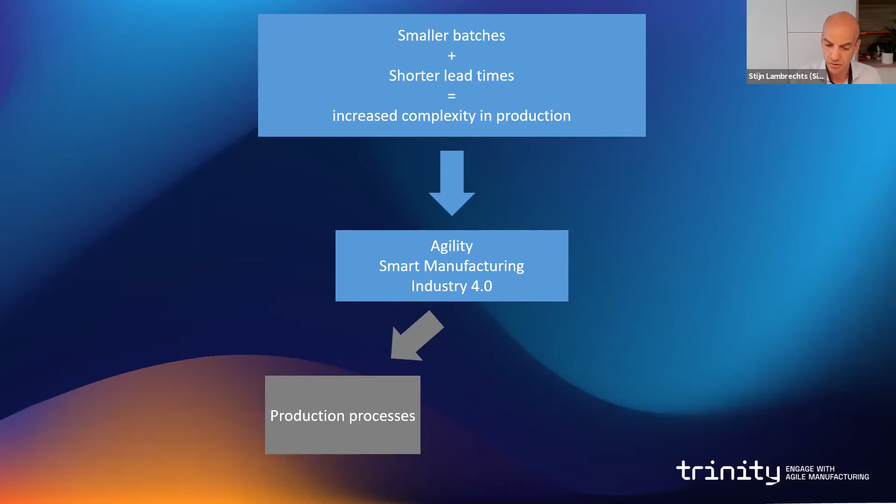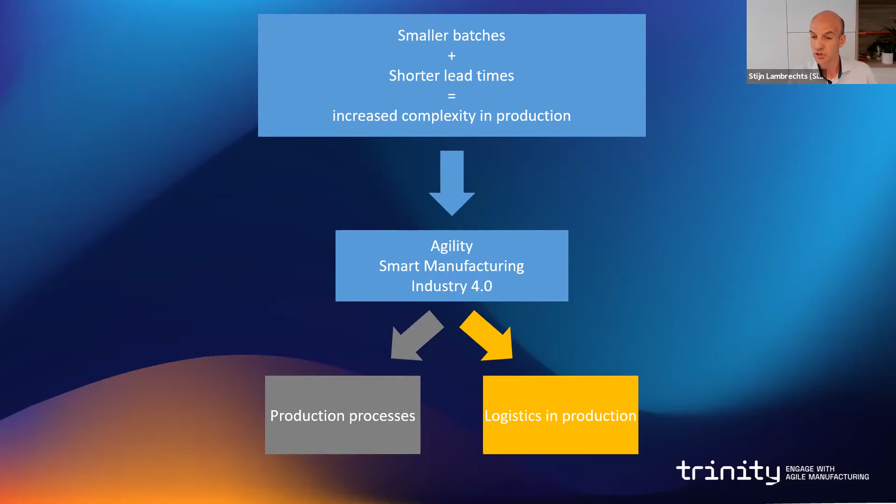Today we will be talking about the processes that link these different production steps to one another. Today we will talk about logistics in production. And when we look at figures and see that sometimes up to 50% of the time an operator spends is on logistical tasks, it means to us, we are convinced that there is still a big opportunity to improve for companies in this production logistics domain.

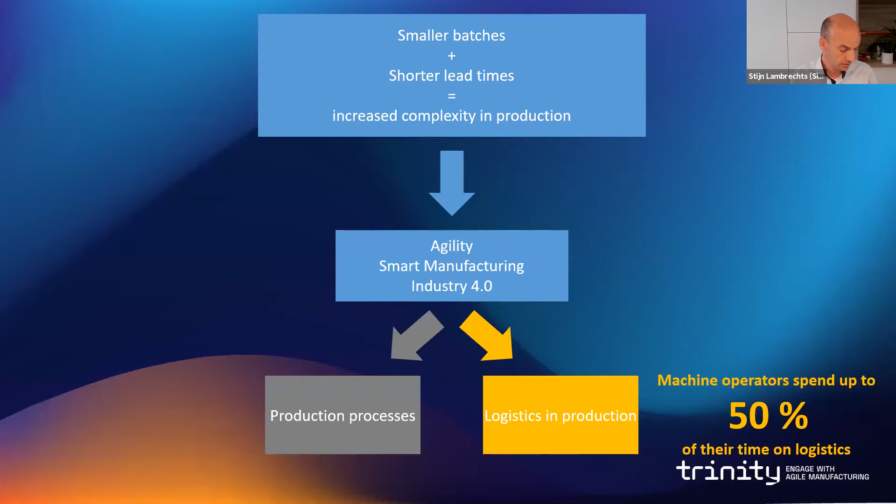So that's why we decided to do this project. Now, when you start with production logistics, there are always three domains to consider: operations technology, the hardware; information technology, IT, the software. And you will see that in the coming 50 minutes, that will be the major part of what we will be discussing.

But to be clear, it is actually the operations management, the way you organize your production, that's where it all starts. The situation at the company involved in this project, Altachem, is that they had already a very good installed production organization. So if in your company that is not really the case yet, it's really worthwhile to look first at the organization.

And then only look at OT and IT to add them to this good organization. When we zoom in a little bit on the specific project we want to present today, at Sirris we always want to make the vision of Industry 4.0 a reality. So we call it '4.0 made real.' And also this project frames in this willingness to make the 4.0 vision real.

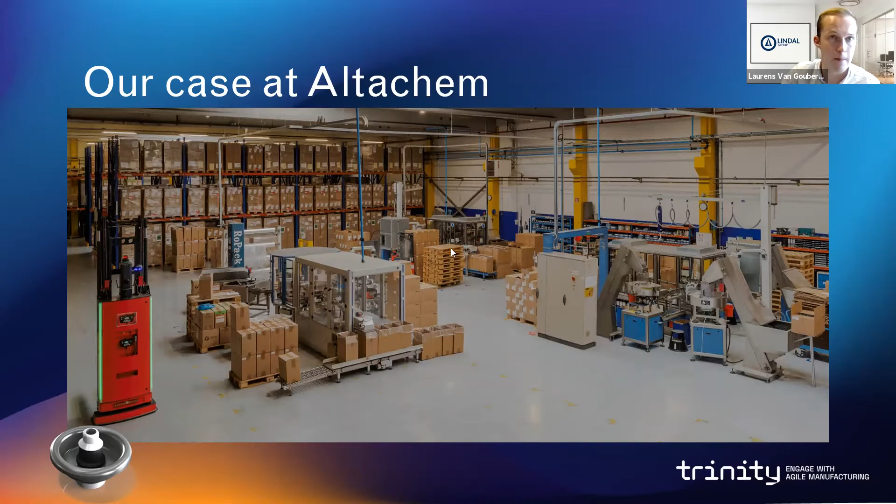But first, let me tell you something more about our digitalization and the way we are striving to work more efficiently. That's why we also implemented some digital tools.

The first one is our OEE dashboard. This is also visible in the production hall, so operators have a real-time view on the efficiency of the machines. They can also see machine stops, so they can react really fast.

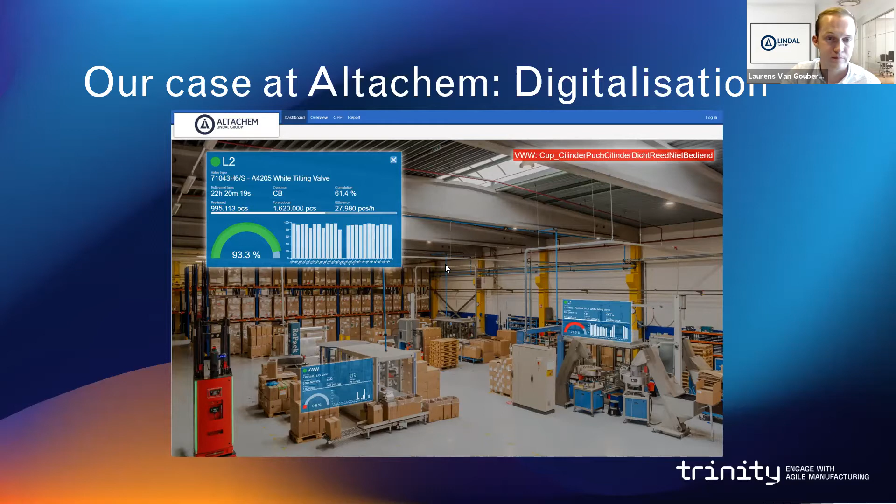A second tool we have is our production dashboard. Here operators can process running orders and do the necessary entries. We also have our SharePoint platform where operators can view digital work instructions, make reports, check the agenda, and find general announcements.

And also, as of the beginning of this year, we integrated an AGV. This one supports our operators and warehouse clerk by helping with intralogistics. The AGV is used for inbound movement, supplying the machines with components, storing finished goods in the warehouse racks, and also doing the outbound movement.

The operators can use it on the same digital screen as mentioned before, and they can just ask the AGV to pick some pallets and bring them closer to the machines.

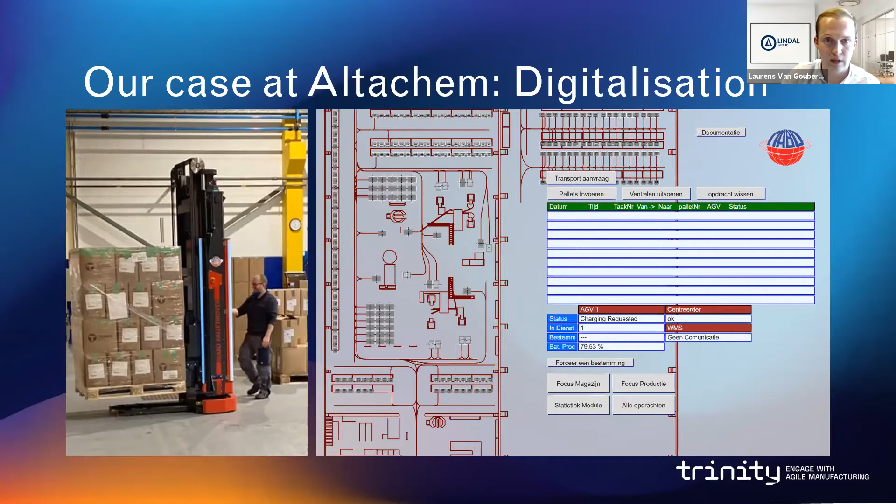Now I'd like to tell you more about our current way of working. This is a picture of our production hall, and we have three machines here. At the moment, an operator or the AGV will pick some pallets out of the racks and bring them closer to the machine. That's basically supplying the machines with components.

Then it's up to the operator to supply the machines with the components on the highlighted locations. I can show this with a small video.

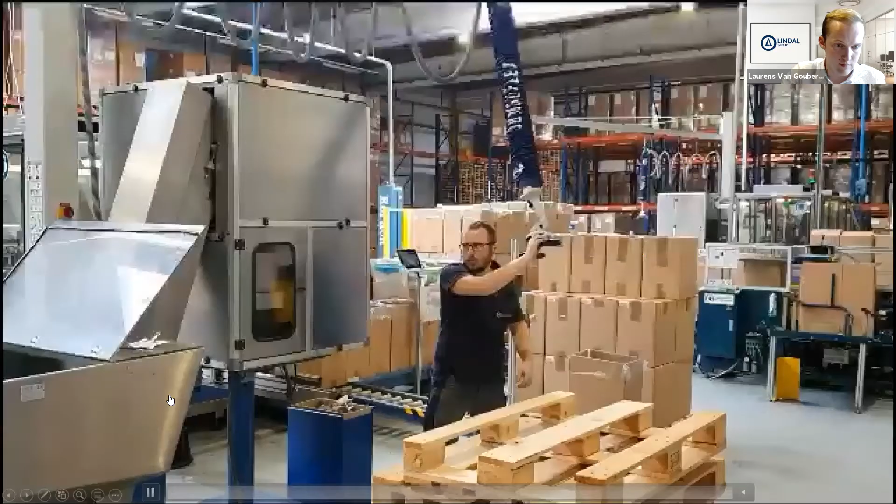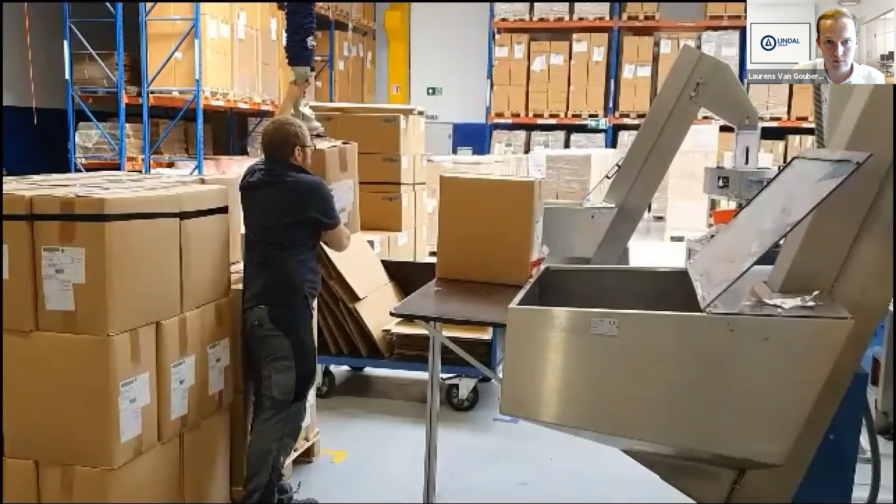By using a vacuum lifter, the operator will pick the boxes and empty them into the machine. He opens the boxes and empties them into the bunker, and he'll do that for all the stations on the machines.

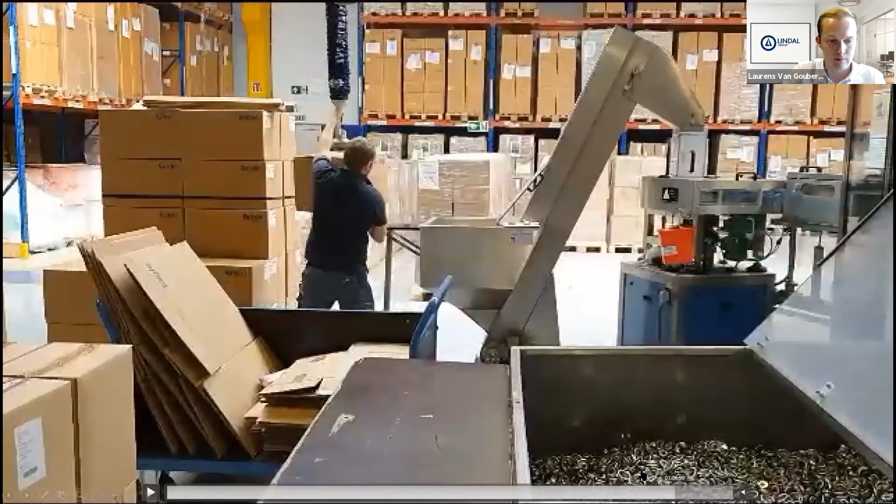Now he'll go to the other position and do the same. So this is the first step, supplying the machines with components. In the second step, he also needs to make boxes and bring them closer to the machines.

Here he's operating a box erector. He puts a bag into the boxes, and then when that's done, he will put them on the machine.

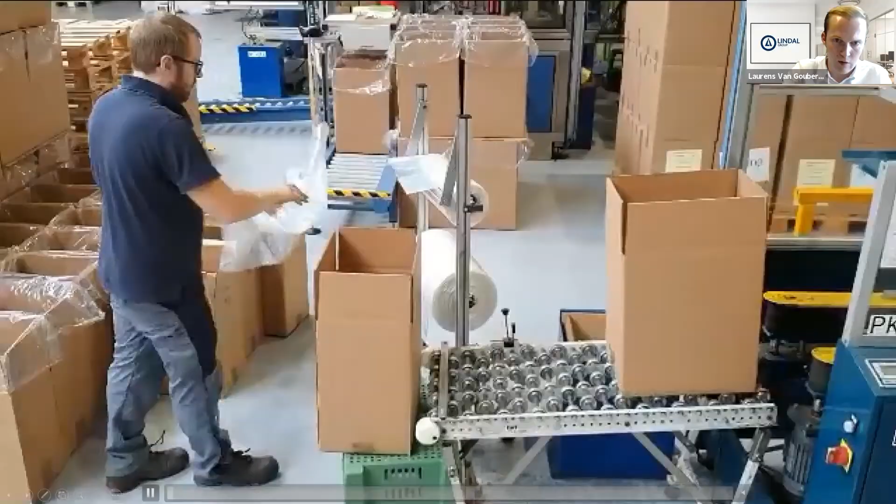Laurens, we can't see that movie. No wait, can you see it now? Yes, okay, my apologies.

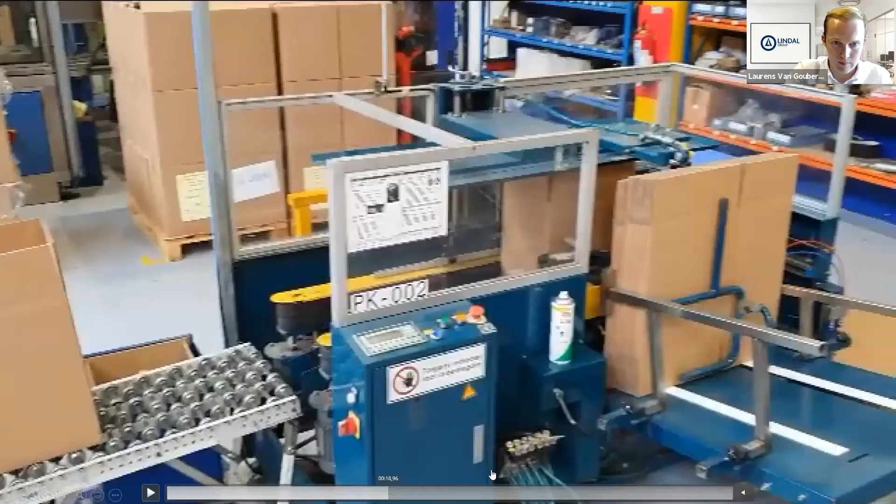So the operator will put a bag into the boxes, and then he'll put them on the machine, doing it for all three machines. He's doing that here on the highlighted area.

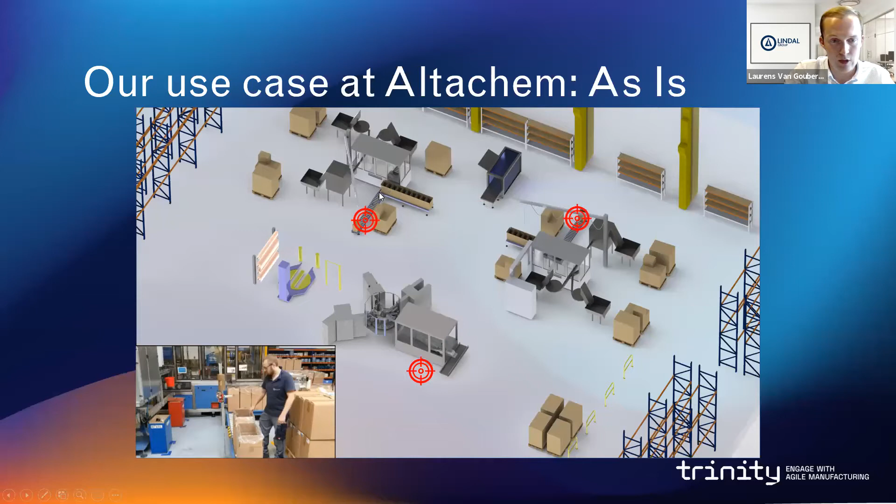But then, when the machine has assembled the valves and put them into the box, it's up to the operator again to finalize the process. He does that by shaking the box, closing the bag, closing the lids, taping it, and then palletizing it.

The same principle applies: he's using a vacuum lifter to pick the boxes and palletize them.

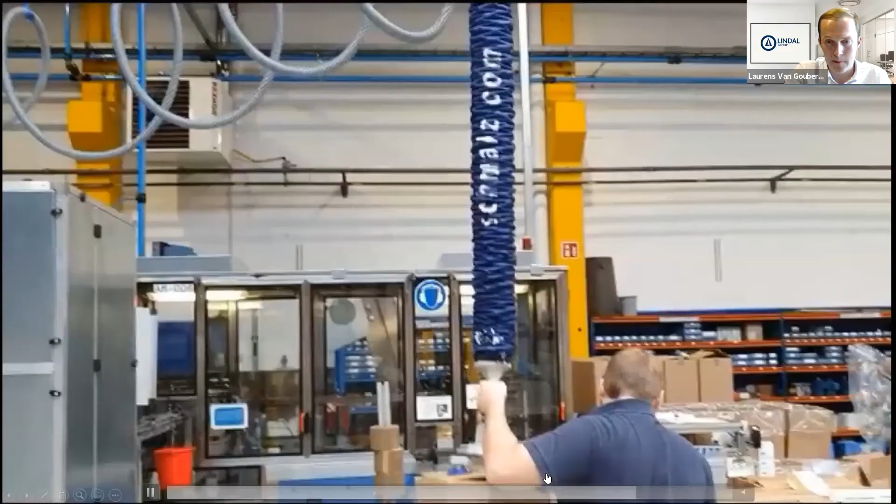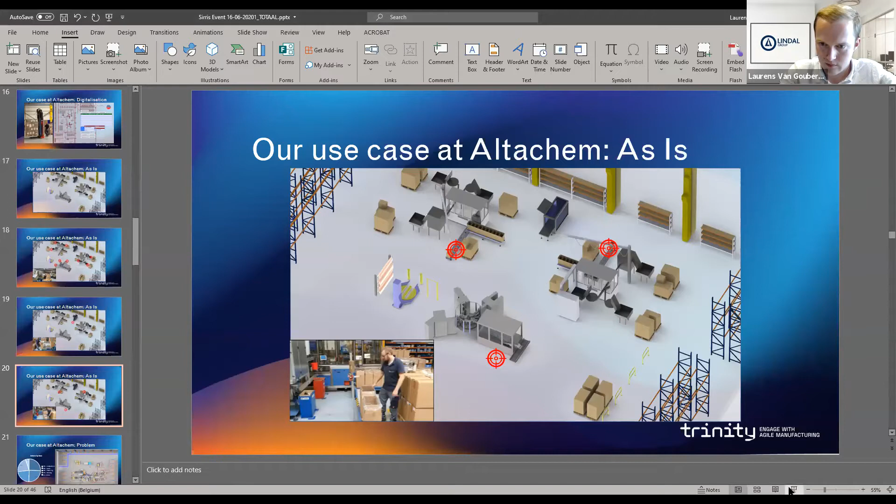That's basically the current way of working. So we have at the moment a decentralized system where all the pallets are put next to the machine, and all tasks are individual per machine.

So when you look at this in an spaghetti diagram, we can see that the operators need to walk around a lot. And this is only for two machines, not three.

If we make a division based on the time spent on all the actions, we see that 25% of the time is spent on supplying components, 25% on making boxes and putting them next to the machine, 23% on palletizing, and 22% just spent walking around from one action to another. The remaining 5% covers other things such as machine interventions and so forth.

So our operators do around 17,000 steps in a shift. They need to walk around a lot.

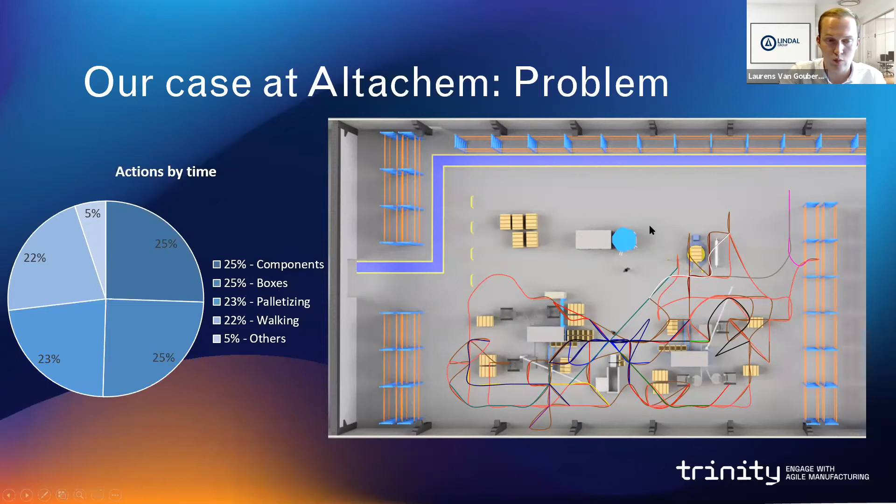We do not feel like this is the way to go for the future if we have more machines and want to work more efficiently.

So in the end, our problem and the case we are working on is to be future proof. If we have three machines or even more in the future, will this still be a good way of working? We also want to focus on efficiency and increase productivity without increasing the workload, since it's hard for an operator to operate all three machines.

If there will be more machines in the future, it's not feasible to continue this way of working. You can also see we have a vacuum lifter for every machine. Should we still do it in the future or not? Well, with this way of working, we should, but it would be nicer to have a centralized way of working, meaning that we should not have all the pallets near the machines and palletizing here, palletizing there.

We also still want all the tasks to be human-centered, so that the operator is still in control of what's happening and still has a grip on the production. And also, if we do the changes, we want to limit the impact on the current equipment. It cannot be the goal to change the machines in such a way that it's even harder than before.

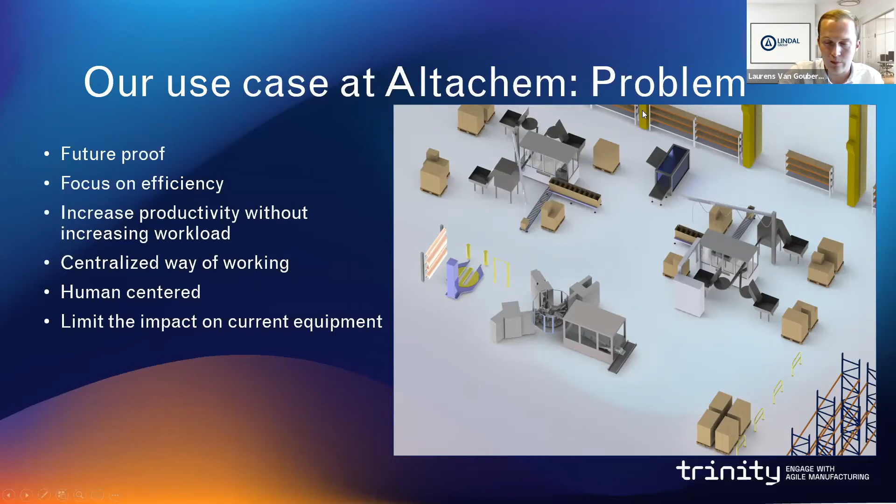And now I'll leave it up to Peter to talk more about the solution.

Thank you, Laurens. Good morning, everyone. My name is Peter Paulissen, Senior Engineer at Sirris. And together with Stijn and Philippe Vincent, we are working on this Trinity project from Sirris side. Today I would like to show you our results of the project till now.

The topics that I would like to mention are the goal of the project - Laurens already told you the case, but I want to summarize some things - the concepts that we have developed, the economic feasibility, very important, is it possible or not, the chosen AMR types and the communication between different brands of AMRs. And in the end, I will show you a short movie of our demonstrator in our lab in Sirris, and at the end, some very short next steps.

As you already heard from Laurens, the goal of this project in terms of shop floor layout is to limit as much as possible the pallets around the machines. So we want to avoid that. And also we want to minimize the pallet movements in production because they want to create room for additional machines in the future.

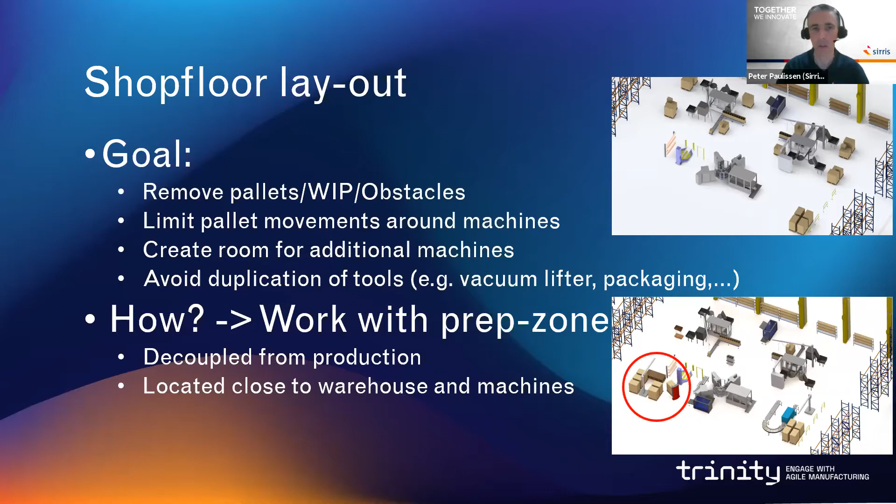Also, they want to avoid duplication of tools, because when you put a new machine in the current production shop now, you need on each machine a vacuum lifter and also extra packaging. You have to duplicate them, but you want to avoid that. How can you arrange that? By working with a preparation zone, like you can see here in the picture - a zone decoupled from the production, but located close to your warehouse and to your machines.

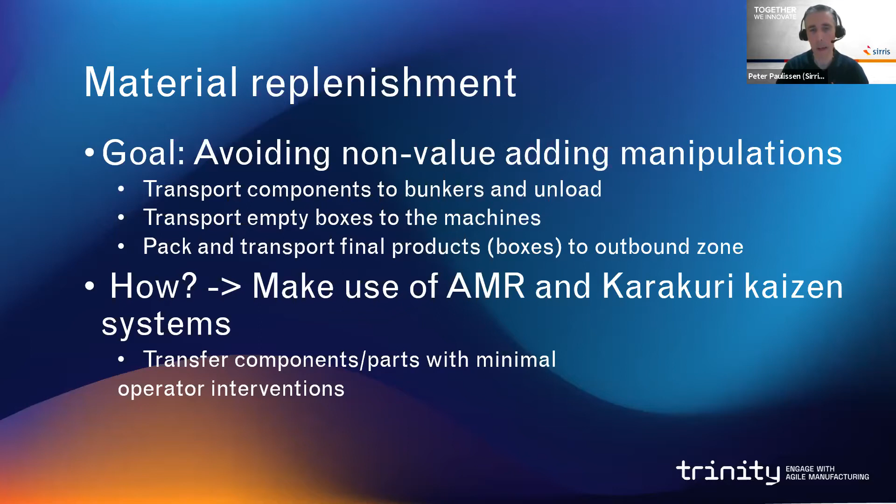What about material replenishment? We want also to avoid non-value adding manipulation from the operator, such as transport components to the bunker and unload them, transport empty boxes to the machines, pack and transport final products also in boxes to the outbound zone. How can you do that? Make use of AMRs in combination with Karakuri Kaizen systems, so transfer components, parts with minimal operator interventions, like you can see here in the movie.

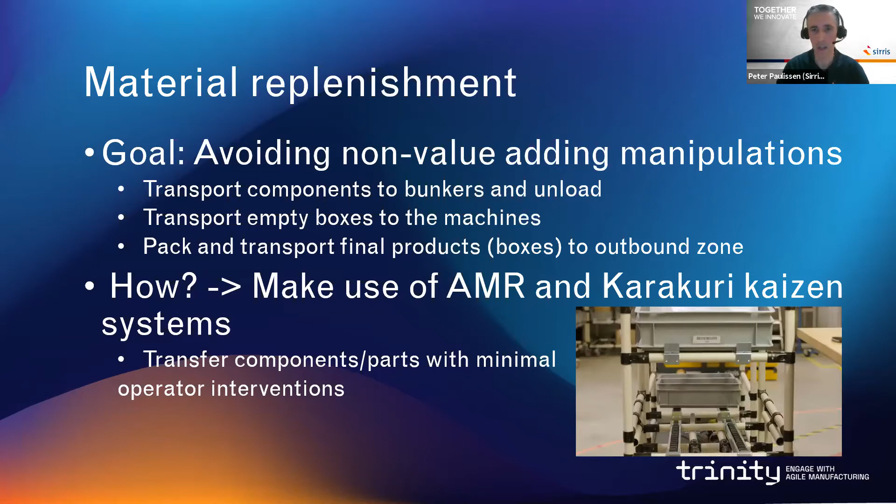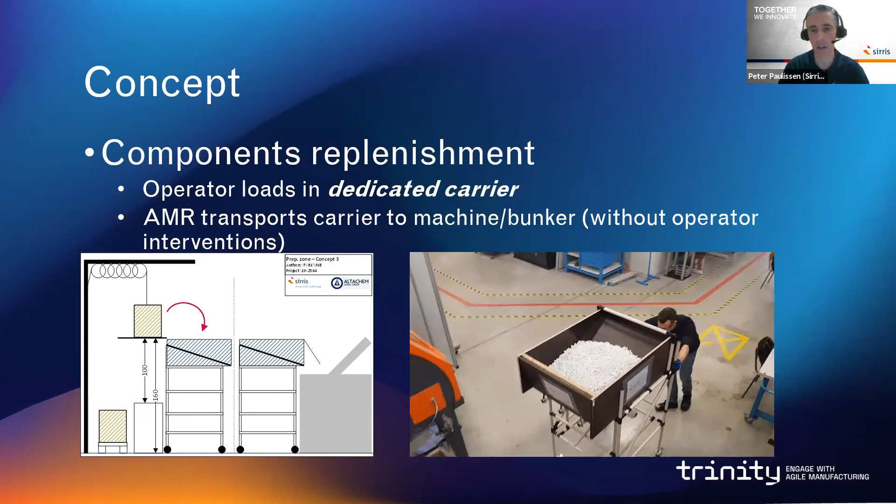So we started with these challenges and came to the following concepts. First of all, for the component replenishment, in the preparation zone, the operator can prepare the required components. This is where we came up with a dedicated carrier, where the operator can drop 2 or 3 boxes with components into that carrier. And as you can see in the movie, a Karakuri Kaizen system will fill the bunkers without operator interventions. And this carrier can be picked up by an AMR to do the transport from the preparation zone to the bunkers.

What about the empty and full boxes? We were looking for a solution to transport these boxes to the machine and to the outbound zone. We came up with a concept with an AMR with a driven conveyor on top of it. It is also important in the PLC of this conveyor that we want to set speed, turn-off times, waiting times, and so on, because there is a difference between an empty and a full box. Of course, the height is also important, the height of the conveyor. This is depending on the existing conveyors at the assembly machines at Altachem, and also the top box taping machine at the end. So in this case, the height of the conveyor is 660 millimeters.

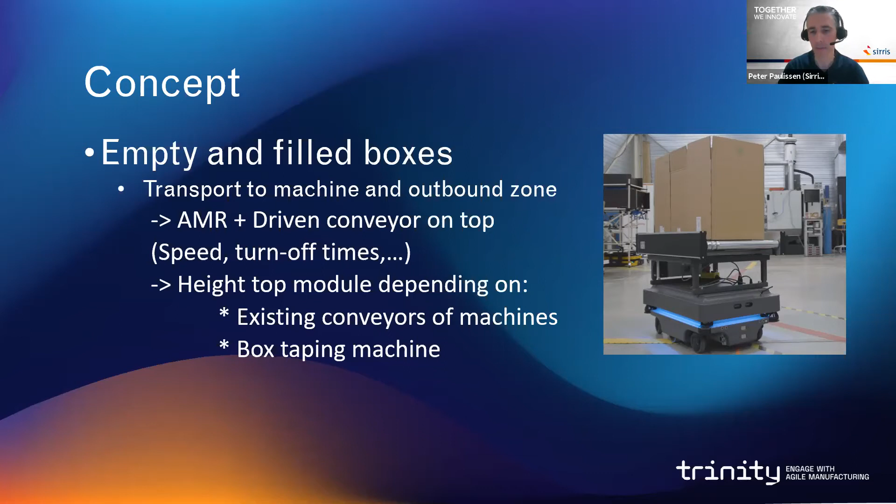So as a concept, we need AMRs to transport carriers and boxes. But what about the economic feasibility? Is it possible or not? Two important questions are: how many FTE are needed in the preparation zone to prepare 2 machines? And how many AMRs are needed for transport?

First of all, the operator occupancy. To get a quick and first impression of the feasibility, we used a simple Excel sheet, no expensive simulation software. With Excel, you can already get a good first impression of your needs. We did that by means of observations in production, videos, and proof of concept tests, and so on. So, like you can see here in the picture, one operator should operate 2 machines. His occupancy is 42%, so he still has enough time for preparing other materials or throwing away waste, and so on.

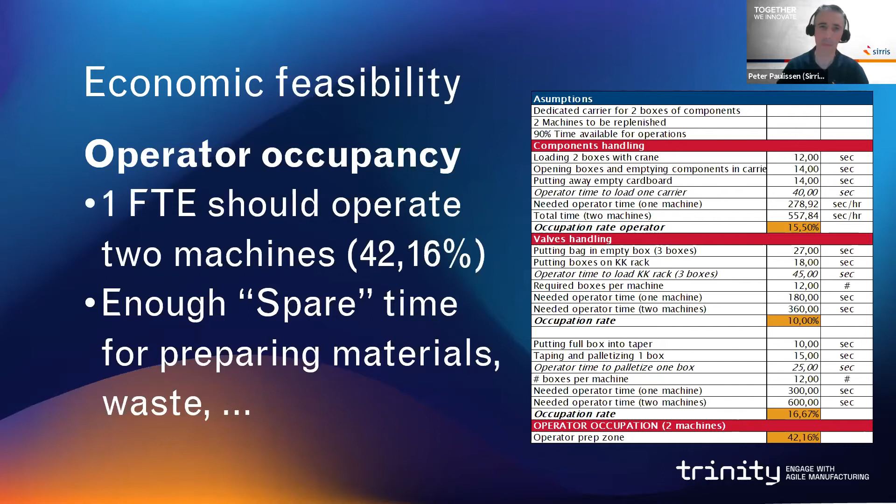To transport the boxes, we chose the MIR 200. This AMR also has a payload of 200 kilo, and we built a conveyor on top.

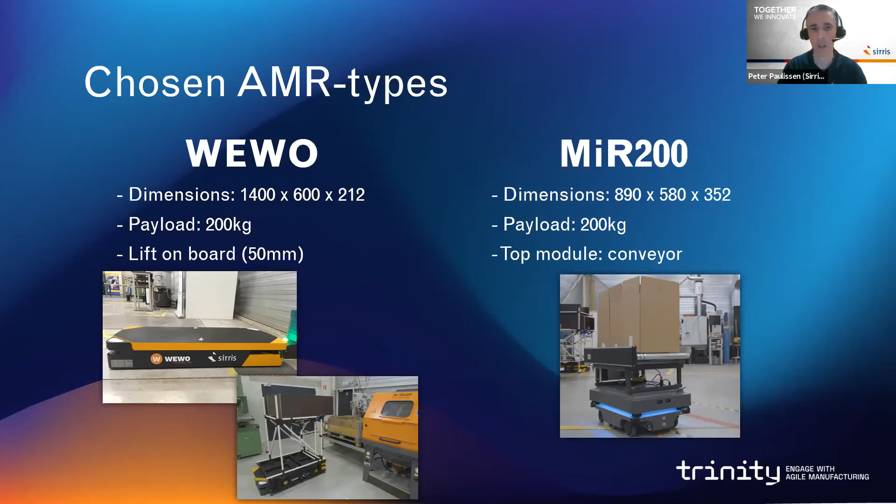What about the communication and sending orders to the AMRs? Each AMR has its own software user interface to create maps and missions. Both AMRs work on the principle of SLAM, simultaneous localization and mapping. What's the meaning of that? We let the AMRs drive around in their new environment, and the map will be created by natural orientation points in your production, so you don't need to place extra landmarks. You can create your map with natural points in your production, like your machines or walls and so on, and the AMR can localize itself afterwards into that map.

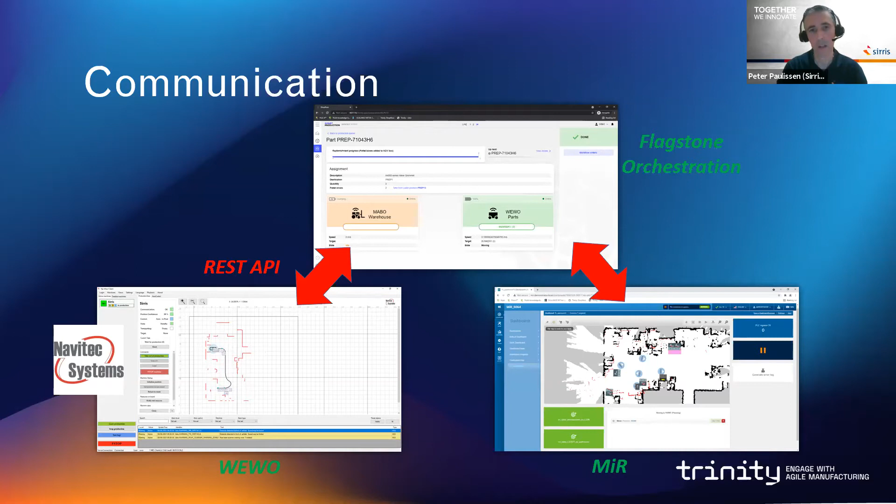But to send orders to the AMRs via the orchestration platform of Flagstone, we have set up a REST API for both AMRs. So you need a REST API when you want to send orders to different brands of AMRs. About the orchestration software, Joris will tell you more in the next presentation.

In the following video, we show you our results till now in our lab in Diepenbeek.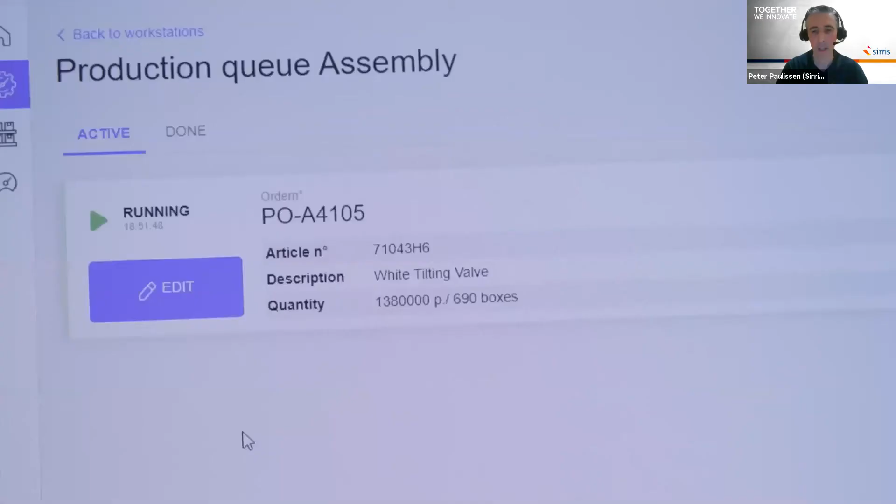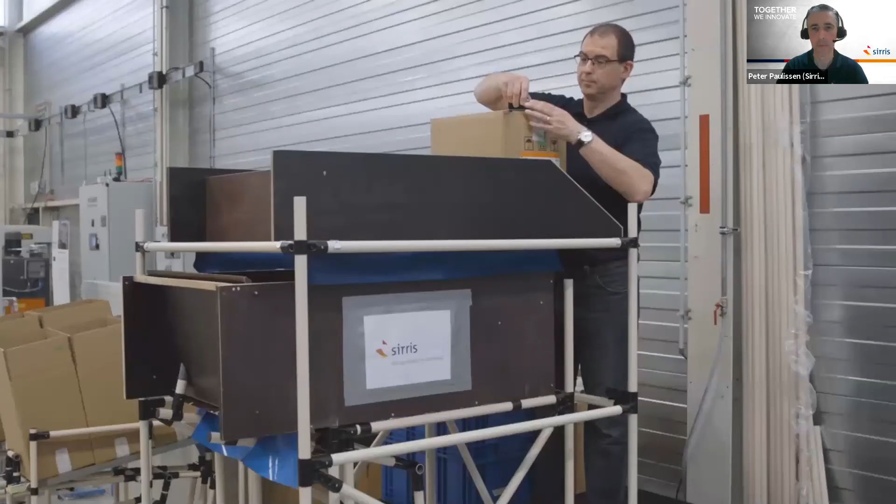This is my colleague Philippe. He is simulating an operator at the assembly machines of Altachem. He's going to request components for the bunkers via the orchestration platform of Flagstone. Also, the request for empty boxes and full boxes can be done with this interface. This order is then sent to the preparation zone, where Philippe is again the operator. He starts this order there and fills the carrier. After filling, he closes this order so Flagstone can start the Wewo. The Wewo lifts the carrier up and starts driving to the bunker.

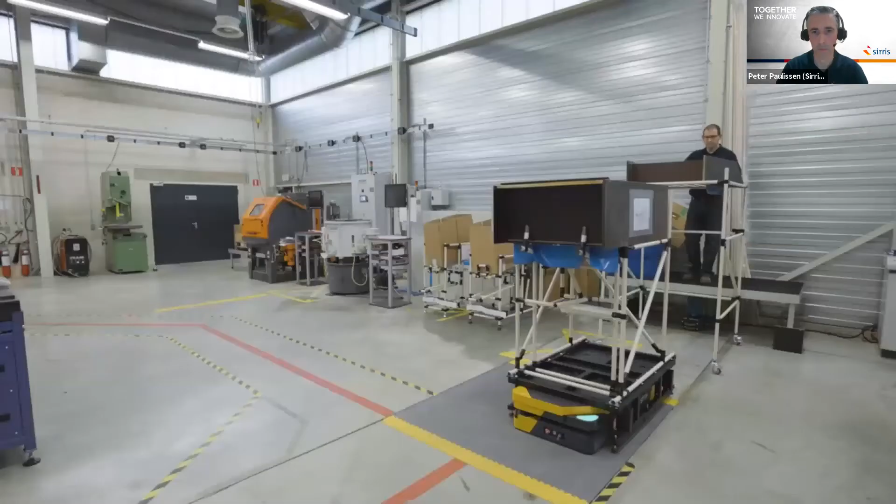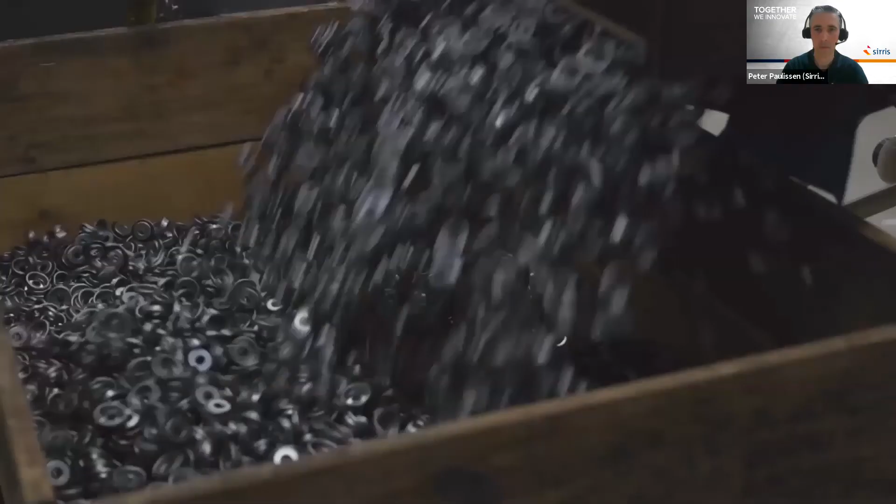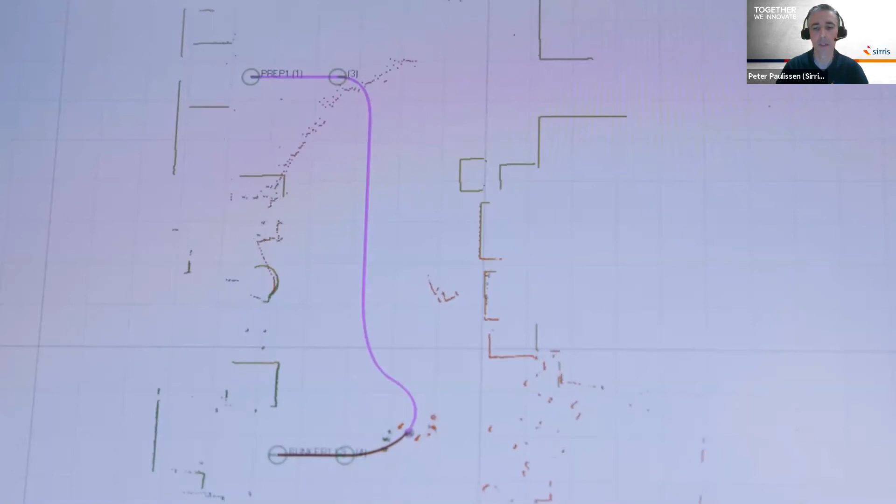Here you can see the Wewo software environment. By a Karakuri-Kaizen system, this carrier is emptied at the bunker. So the Wewo will dock at the bunker, and with that Karakuri-Kaizen system, the components can fall down into the bunker, and afterwards the Wewo will drive back to the preparation zone. Here you can see what the safety scanners detect of the environment when driving. These scanners are also used for safety and will, in this case, stop the AMR when an obstacle or person is detected.

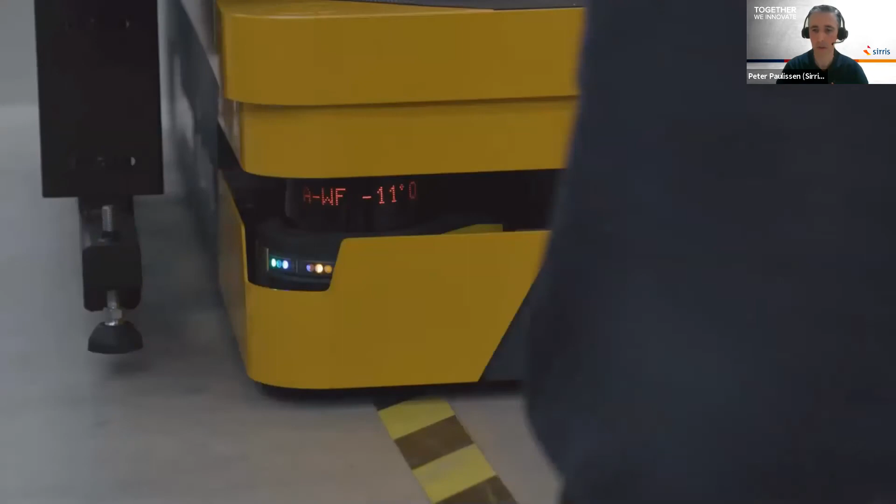The charging of the battery can also happen automatically with this charging station.

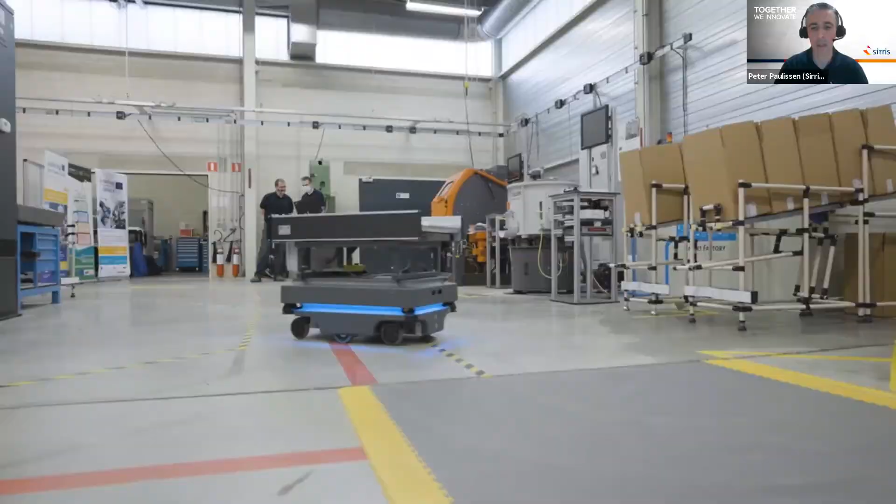So till now the components, then the boxes. The MIR with conveyor will bring, in the first case, the empty boxes to the machines. Via also a Karakuri-Kaizen system, 3 boxes are loaded on the MIR and the 4th box is stopped. You can also see it here in the movie.

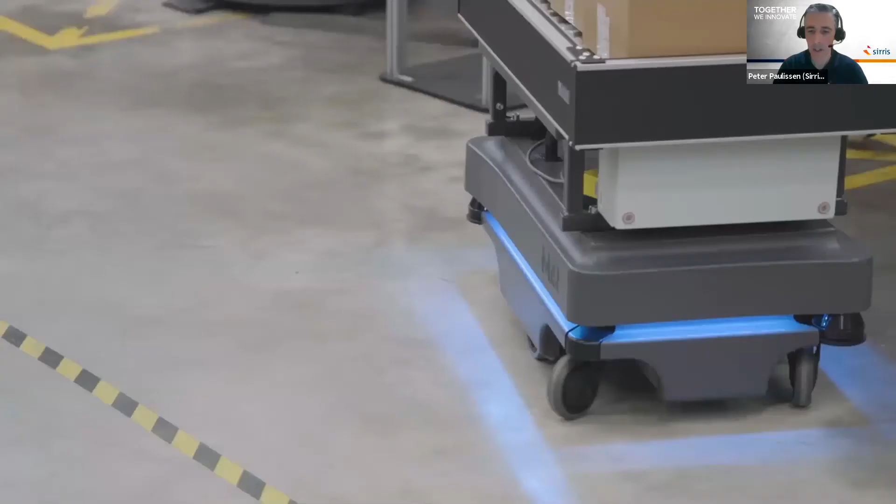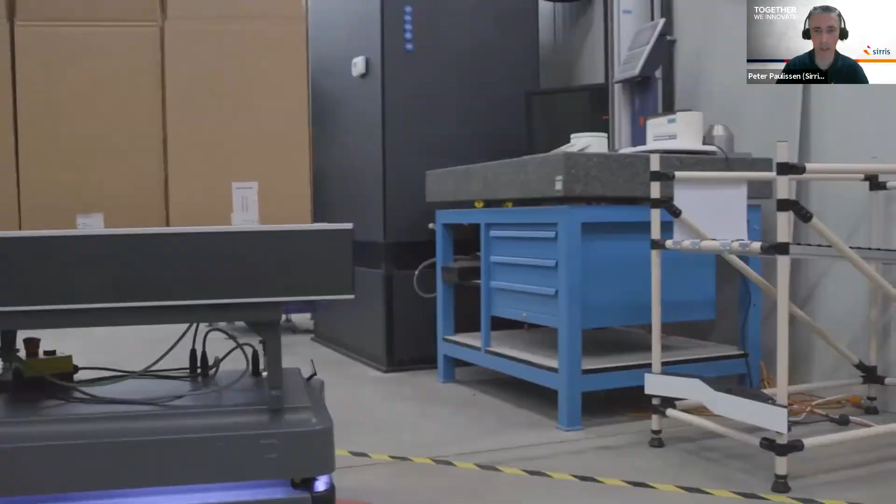The delivery of these empty boxes is simulated in our lab with a pipe and joint rack. This is the interface of the MIR. The accurate positioning of the MIR is done with V marks, like you can see here.

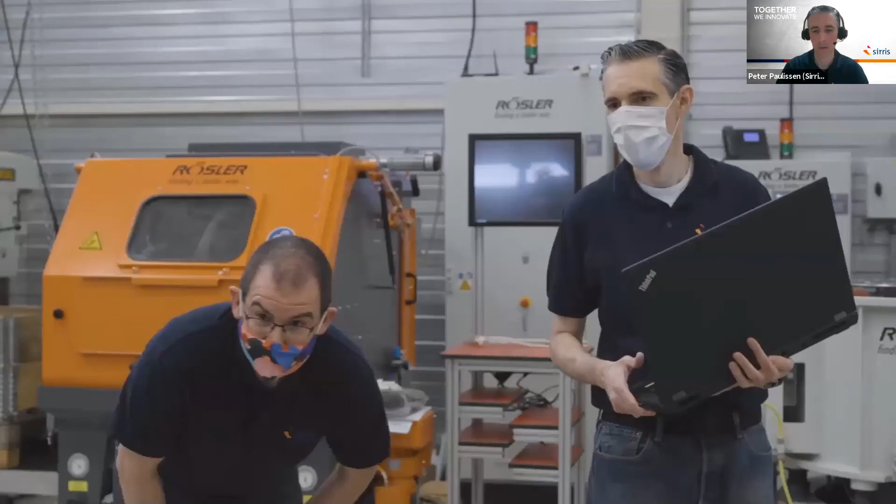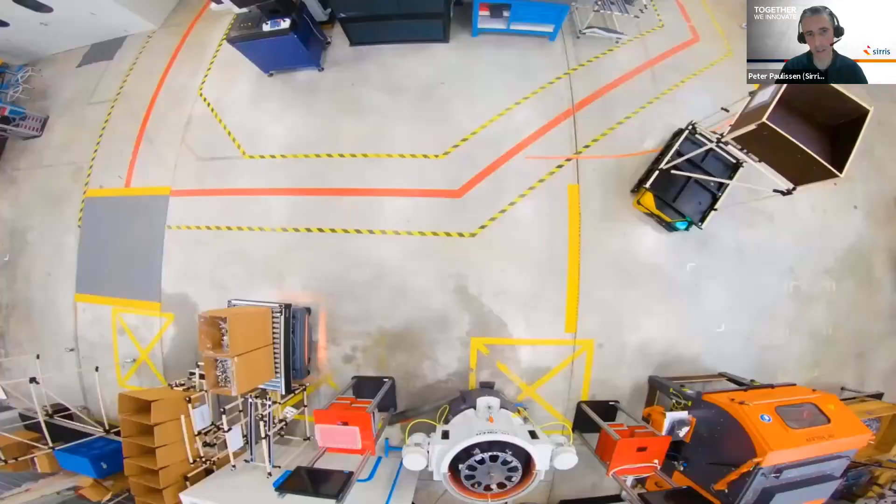If both AMRs detect an obstacle, each other in this case, the WEWO will stop and the MIR will calculate a new path around the WEWO. We have chosen for safety reasons to stop the WEWO because this is the biggest AMR with the highest weight. And when the path is free, he drives further.

Okay, next step is of course the integration of this demo at the production floor at Altachem. For the results, we want to implement that the next 2 months this summer. And for the results, we hope we can invite you on the 30th of September, but of course depending on the Corona guidelines at that time.

And now I will give the floor to Joris. He will tell you more about the Flagstone orchestration software.

Thank you, Peter. Let me try to take over the screen. One moment, please. So my name is Joris De Sutter. I'm a project manager at Flagstone. And like the previous speakers already told you, Flagstone is the partner in this project, the Trinity project, responsible for the software part of this project.

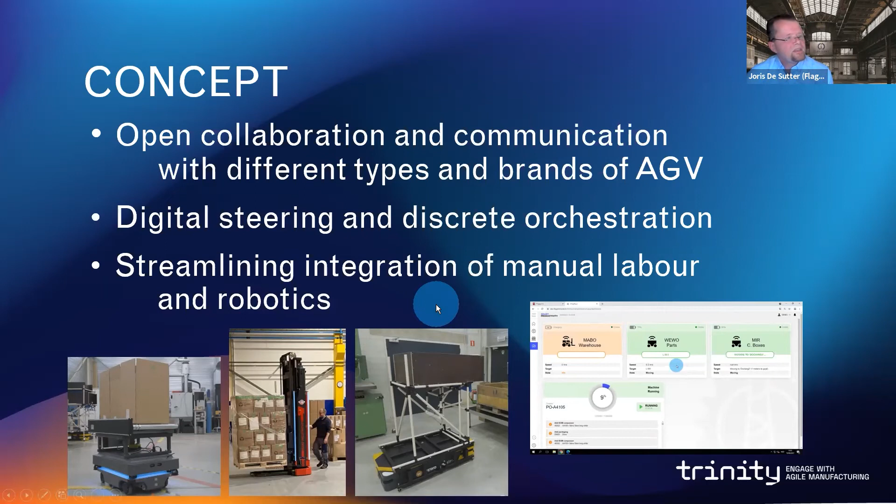So this is all tackled through digital steering and discrete orchestration. And of course, what's also important is that our software has to be user-friendly. You see already a small screenshot here. So what we aim for is to streamline the integration of manual labor and those robotics.

So our manufacturing execution system has tackled the complexity of 2 different workstations. By that I mean you have the 2 assembly machines and the preparation zone - 2 different workstations. They have very different workflows, of course, but they are dependent on each other. So if an order is passed on one of those workstations, this influences what happens on the other. Those 3 different AGVs, who provide the internal transports, have to work together in combination with the manual operators. And what we did to make this possible was a modular backend solution, allowing easy changes if changes in the logistical process are needed in the future.

There are 2 machines in the production hall that need to be supplied by parts. They are named here Line 1 and Line 2. The 3rd block shown here, a bit apart from the lines, represents the preparation zone. This is where the parts for the machines are prepared from the warehouse, hence the W. For the purpose of this short demo, I will switch between 2 browsers. The first one is the screen seen by the operator at machine Line 1. The second screen is the one seen by the operator of the preparation zone. Let's start at the machine.

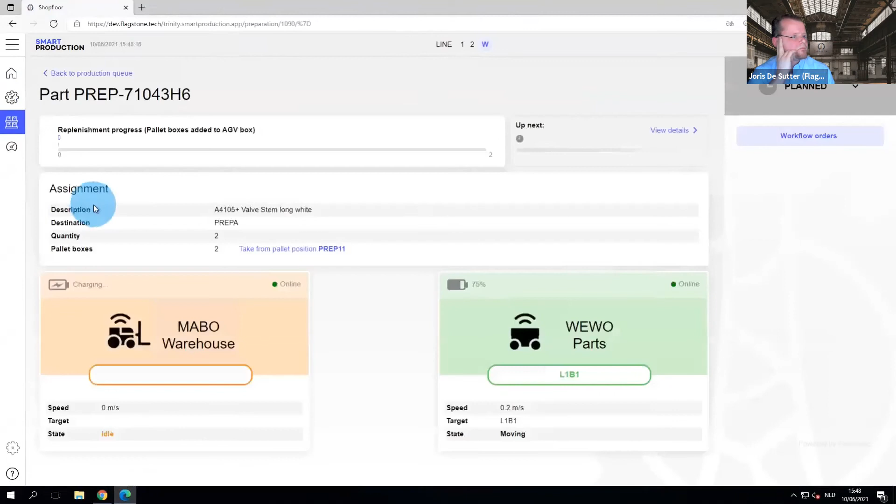This generates a new order for the preparation zone. Switching to the screen of the operator who mans the preparation zone, we see the order arrival for those parts. The preparation operator opens that order and views the order details, seeing that 2 boxes are requested for that specific part.

He also sees that the AGV Mabo is idle for the moment, which is the AGV that brings refill boxes from the warehouse to the preparation zone. The operator should still have plenty of available refill boxes there. He also notices that the AGV WEWO is still moving, that same AGV that will collect the parts from the preparation zone and bring them to Line 1.

He clicks the Planned button and starts the order. The operator takes 2 refill boxes from the stack and starts filling the tray for the WEWO. There are 2 trays, one in transit on the AGV and one in the preparation zone, which the AGV will alternately take away. For every box the operator fills, he clicks the New Booking button to keep count. The last box has an extra Call Pickup caption, which calls the AGV WEWO to come and get the filled tray.

Returning to the Line 1 screen for the operator at that machine, he can now look at the workflow orders and see that the AGV WEWO is on its way to deliver the requested parts. Here you can also see the history of recent workflows: full cardboard boxes with finished products moved by AGV MIR to the palletizer, and a previous order for parts.

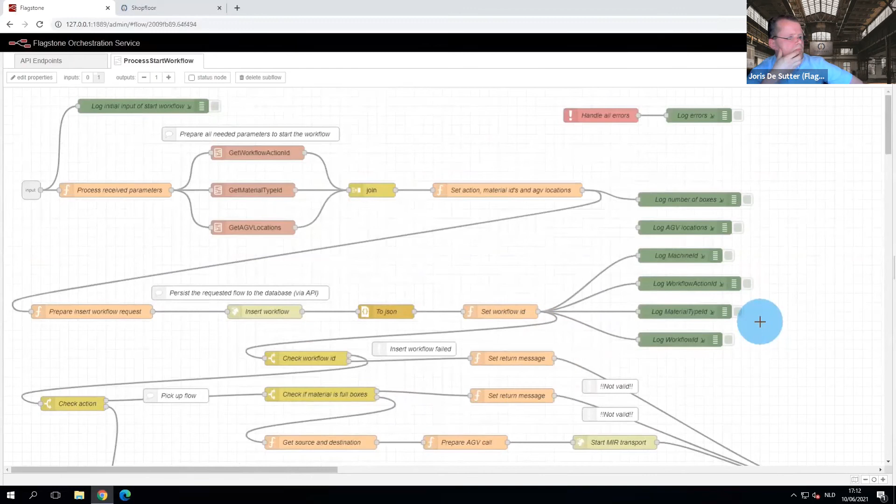By visualizing the flow in this wire diagram, the development of the project was allowed a much better overview and unsurpassed flexibility. This allows all of our staff to easily chip into this project, even without much preliminary knowledge. This results in a great advantage for our company in easily pinpointing nodes in the flow that need adjustment or bug fixing, but also a great advantage for the partners in the project, who can rest assured that our reaction time is greatly reduced when changes need to be applied.

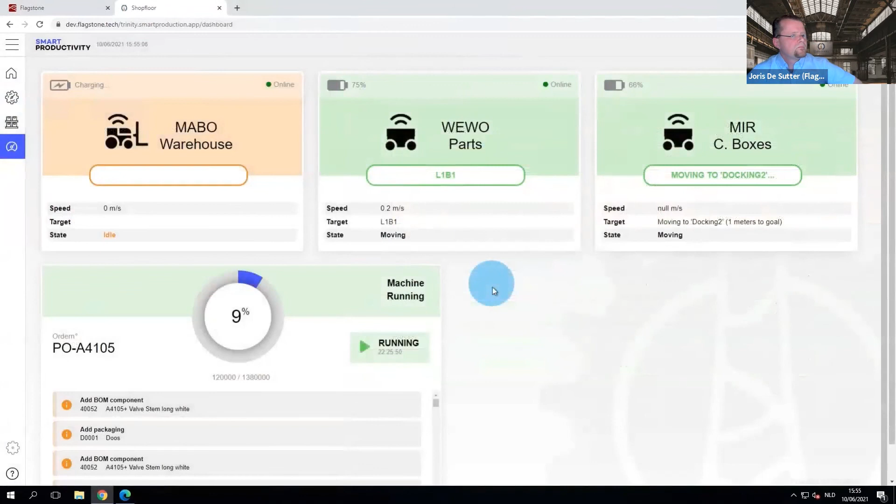Everybody knows how rigid logistical processes can be in real life. Our manufacturing execution system software solution makes any adjustment much more flexible. We hope to demonstrate here that we succeeded in orchestrating different AGV devices and manufacturers to streamline the automation of the production process, while still always taking the human factor into account, by providing user-friendly interface screens and integrating human labor with robotics by visualizing them together.

There you have it. So I hope the video was quite clear in what we tried to do within this project. Let me continue with just a few takeaways, which we think are the most important ones for the work that we have done. So we succeeded in a simple orchestration with different types and brands of AGV.

We made sure that there is a flexible and agile adjustment possible for the logistical processes now and of course also in the future. And by using our user-friendly software, we guarantee the streamlined integration between manual operator and the robotics of the AGVs.

So I thank you for your attention, and I would like to give the word back to Stijn to conclude this webinar. Thank you, Joris, and also thank you to all the other speakers for your contribution today.

There is only one thing that I wanted to show, what are the next steps, what is upcoming. We have been mentioning it already a couple of times. We are aiming for the 30th of September to move what we have made today to the real production environment of Altachem. We are aiming to have an open door that day so that you can come and visit and see in reality how it will work on the production floor.